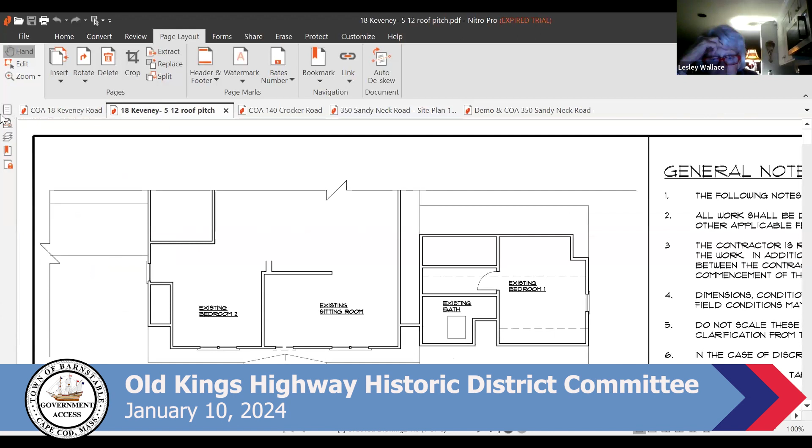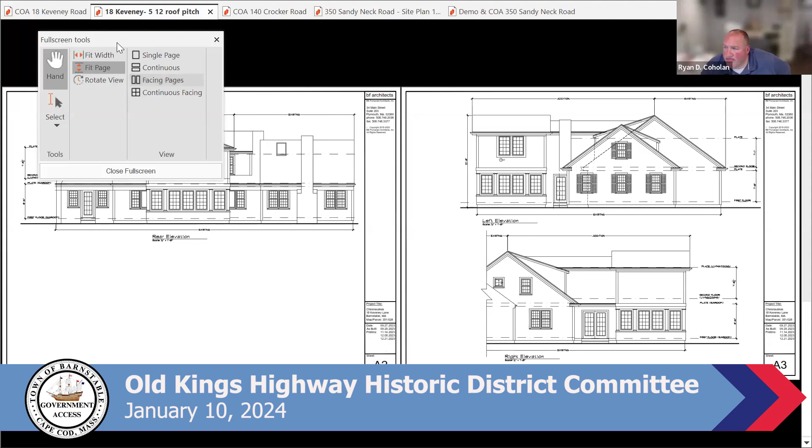If I may, Erica, the images are coming up a little smaller. Can you try hitting the show full screen button in the bottom? You said second floor, I'm looking at the first floor. My apologies. Point over to the left, the full screen, it may just be a little bit easier. Perfect. Thank you, good idea.

I'm guessing that you want a full flat ceiling on that second floor, correct? Yes, we do. Is there any reason why you don't want to clip it so that you can drop the plate?

They're just looking for the full ceiling height across the second floor. Yeah, okay, go ahead.

The reason we're doing this addition is Patricia is the homeowner. Her daughter is moving in with her as her caretaker, and she's going to use this second floor room as her living space.

Do you know what I mean by clipping? Yes, it's something I can explain - where you have the plate height that's less than the full ceiling height, so the windows are set just a little lower, but you're on the second floor, so you can work at the head of the ceiling.

The head of the window at 6'8", but the plate might be less than the 7'4" code requirement for ceiling height. You could probably go 7 feet with the plate, and then you might be able to work more than a 5-12 pitch. I'm not really upset with the 5-12 on the back of the house, but it's a way to work a steeper pitch and match up.

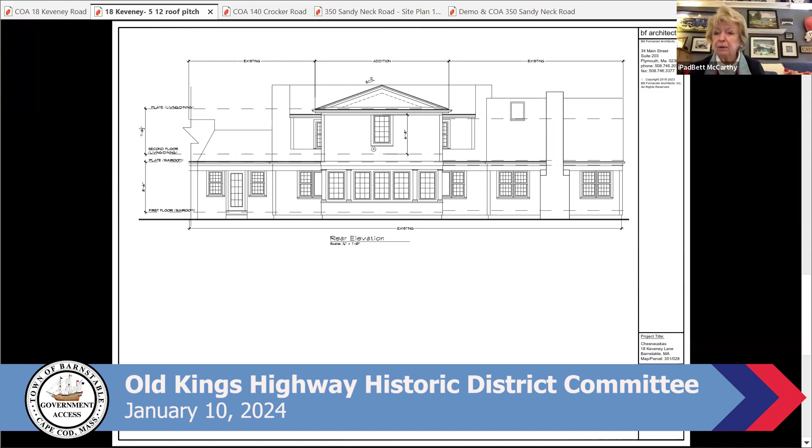I don't have an issue with the lower pitch because this addition is on the back of the house, and I do not think it would look all that attractive if the addition roof line was above the actual roof of the front of the house. So if a modification can be made per George's suggestion, and we come back to the next meeting, that would be agreeable to me. I don't know, but Ryan, do you have any comments regarding this?

Can I see the front elevation again? There isn't a front elevation, just the photo of the front of the house. I think there was a sketch where it showed what it might look like, right? But that was a side elevation, never mind. Yeah, it was the side elevation.

Right, so you essentially want to dormer that front above those 5 windows, right? Oh, it's in the back. Right, I'd like to understand. All right, so that's what you want to lift up. Right, that's what we're putting a second floor on, exactly. And is that ridge visible from the front of the property or from the street? That, and currently, no, you can't see anything from the front. The rear addition, you can't see anything.

But if we put the second floor on it and do a 7/12 pitch per the commission's guidelines, you'd see a small portion of the ridge on the front elevation, but it would be set fairly far back. Yeah, I mean, I think I agree with the commentary we've heard from the other committee members. I would much prefer to not see the ridge addition visible from the front of the property.

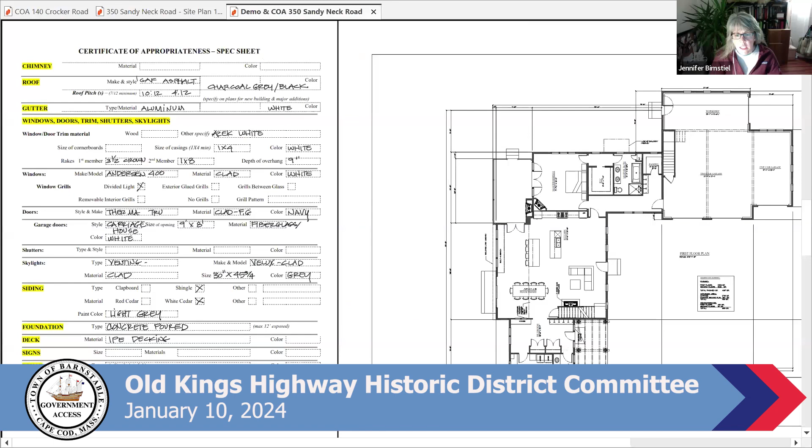So our application is to raise this house and build a new home in this existing spot. We are staying very similar to the footprint of the existing house, but enlarging it and adding on a carriage house garage to the side. We started out looking at it as renovating, but the scope became so much that it made more sense to raise the house and replace it from a cost perspective than to try to make the changes and add on. Part of that was going up, raising the ceiling height, which would have impacted the rebuilding of the first floor quite considerably.

But we have tried to stay in a very similar style to the house that we're removing. If you look at the materials list, we'll be using a pre-dipped cedar shingle, a light gray. We'll be using a carriage house style garage door, an Andersen 400 series Woodwright window, and a dark gray blackish roof shingle. And you can also see the doors that we're using there.

I'm not sure if Don wants to add anything to that. No, all sounds good, Jenny. Thank you. Okay.

We also, I guess I will add one thing. We went through conservation last month, and one small issue with the property is there is a small conservation issue on the property. That was another small reason as far as we're moving the house further from the isolated wetland on the property, which made them happy. The foundation has got a couple of small issues as well, and to be able to move the house away from that isolated wetland area made them happy as well. So that's kind of in a nutshell, the reason why we decided what we did.

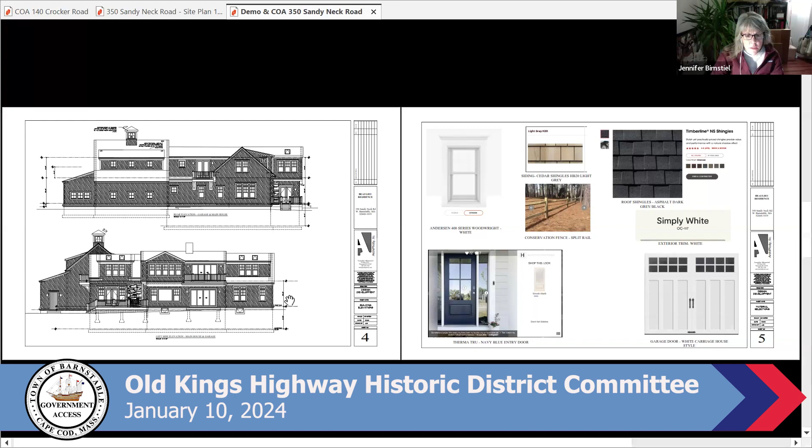You've got a full second floor balcony in the rear, I guess. How deep is that balcony as opposed to the Juliet, the full balcony over the sliders? Can you go to the plan, lower floor? I think it's on the floor plan, it says the depth. Can you put a recliner out there? Yes, I believe it's a minimum of 10 feet. That's over a deck on the first floor. Yeah, it's 10 feet by 16'1" by 11 feet. Okay, so that has a second floor that has a good useful area, which is important.

And the first floor is the same size, I would imagine. Yes. Okay, that could be bigger, but all right, those seem to work rather well. I don't think I have any other comments.

Do we know the roof pitches? What is the minimum? You have dormers, what are those? 3 and 12? There are 4 and 12 on the garage. And the side elevation, I believe they're the same. Yeah, 4 and 12 looks a little less.

I'm opening up the AutoCAD drawing now so I can tell you. Yeah, I still draw with a pencil. I drew with a pencil for the first 8 years and I loved it. My attitude is I'd rather think about what I'm drawing than how I'm drawing. So I've used the computer, but it's not my favorite way to draw.

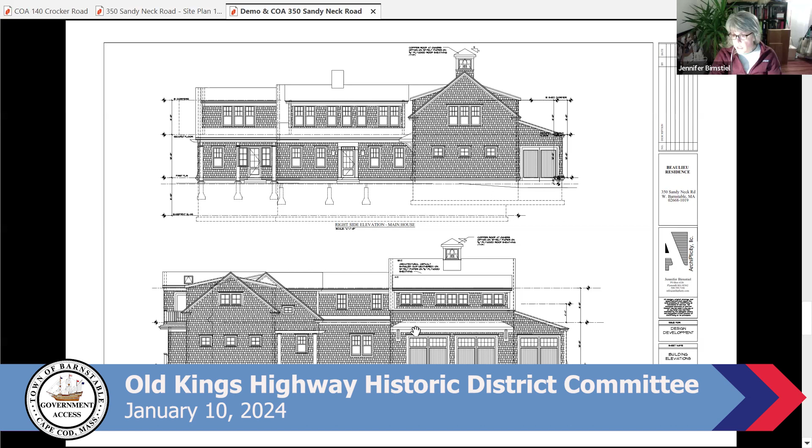Would you be saying, in between that connector piece and the garage, putting a 1-story connector and pushing the garage over to the right a little bit more? Yeah, okay. I just wanted to make sure I was clear on that.

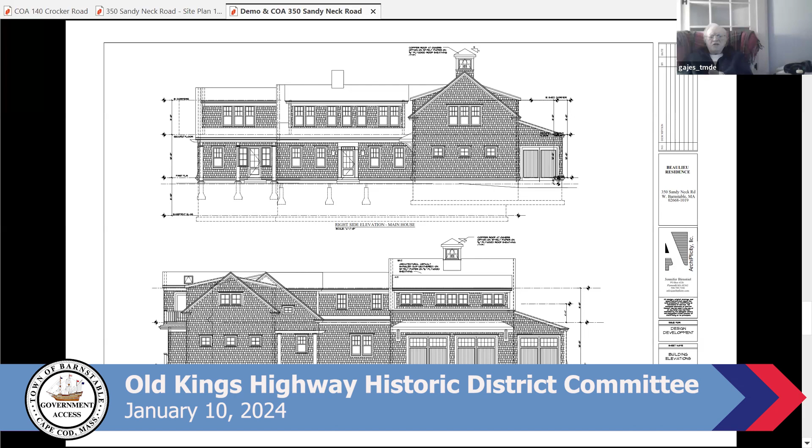What it does is diminish the overall mass by separating it into two separate masses: the house and the barn. It's like having the barn as a separate building, but the connector serves two purposes—it provides a separate entrance into the backside of the house, and it provides that visual separation. It doesn't have to be terribly large, just appropriately scaled so the space between the dormer on the house and the second floor of the barn works.

Scaled, I'm guessing, about the same as your lean-to addition. So what's that—the space above? That's going to be about 12 feet, yeah, something like that. 10 to 12 feet would separate those two spaces.

I think if you were to just overlay it and spread it, you get a sense of what it looks like easily. Of course, with me, I'd have to erase the barn and move it over—either that or cut the page in half and glue it back together. Here again, drawing with a pencil. But with the computer, it's so easy to move that over, and you can play around with the addition in a number of different ways without spending a lot of time on it.

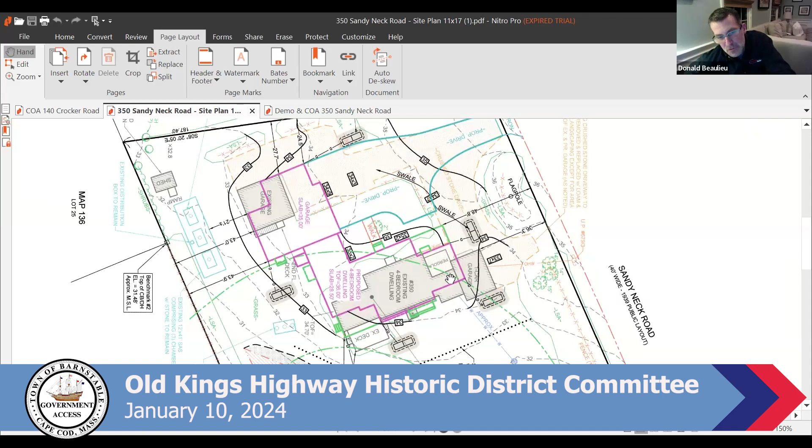But we also have a setback off the edge of the property, which currently we're at 24 feet. I don't know if you're looking to add—I'm not exactly sure. I can't remember what the setback was. I thought it was possibly 15 feet. Yeah, it's likely 15 feet. Okay, how far are you there?

I think ultimately I would ask the homeowner, is that what you want? Do you want a single-story connector? I'm opposed to it, to be honest with you. I can imagine what the interior would look like and how everything's going to connect, and I think any future work above the proposed garage—you're kind of cutting yourself off. I don't disagree.

But we still have the problem of a big structure there, you know? Right. I guess I'm just trying to understand—by the property size, it's just over an acre property. It's not like it's a 10,000 square foot piece of a building or something along those lines. There's a lot of fairly large houses in the area, also in the historic area as well.

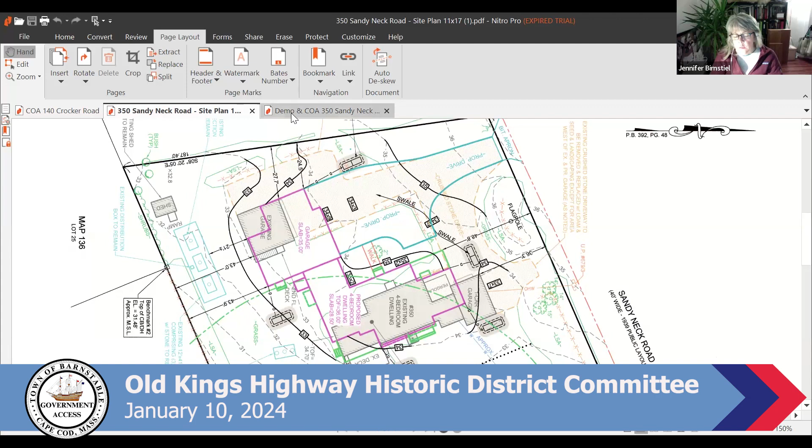Could I ask one other question on the design? If we went to the front elevation - I don't know how Don would feel about this because we haven't gotten to talk about it - but what if we dropped the roof line of the garage so that it was more of a full dormer, so that 10 pitch dropped down to be more even with the eave of the connector piece, so it felt lower. Those windows could be bigger windows, and it wouldn't really impact the use of the space up above, but it would bring your eye line down some. I don't know if that would make anybody feel better.

Well, I don't know if it's the height of it or the length of it that is making it seem bigger. That's the problem. To me, it's the length of it. I like the lines that it is now. I wish you could knock that last garage off, but other than that, it kind of looks nice with that roof line.

Yeah, I think I agree with Leslie. I mean, I like the way it looks right now. I get it's big, but there are big houses in that neighborhood. Sandy Neck Road is not a scenic road - it's in the district, but it's not a designated scenic road. And I think, to your point, we did try to look, even if it's not right on the street, at adjacent properties, to what Don said when we were trying to think of its appropriateness, because it's not a historic property, but it is in a historic area.

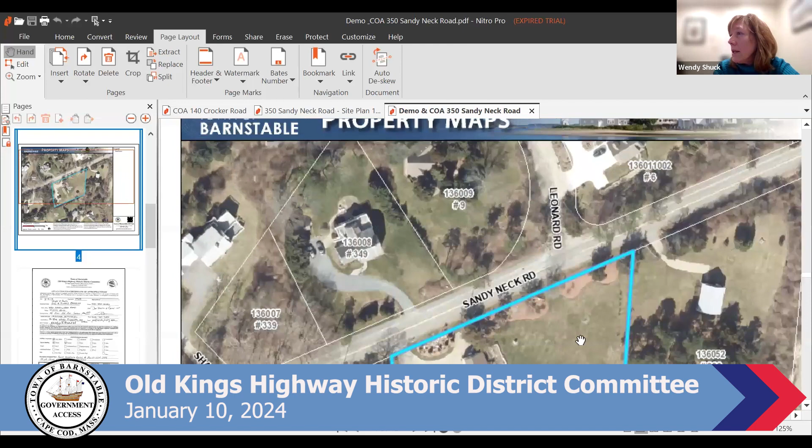You see that floor plan? Yeah, on the right side, it's just a tiny little thing, and this is Beth McCarthy - I happen to agree with what Wendy has said. And I just think this house, as it is proposed, the mass is just much too large, and I think it needs to be reconfigured.

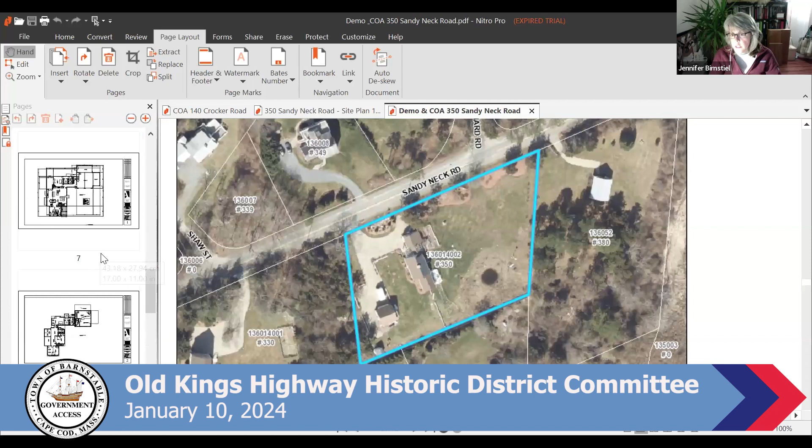Okay. The only other thing I was asking is there a way that might be acceptable without increasing the footprint size of the house? Because I know Don has an objection to doing that. That's why I was asking about dropping the roof line - I understand how you feel about it, and certainly I'm happy to do any drawings to help alleviate the feelings of the committee. But is there any way that you would consider that doesn't increase the square footage of the house?

Is there any place that third garage bay could be moved somewhere else on that barn? That's what I'm thinking, yes. Because 12 by 24, that doesn't seem like a lot, but it adds, and when you look at it, your eye goes to that. Don, I understand you want a place to work, a workshop. My dad had one, I understand it. But your eye goes down, that bothers me. I wish we could get rid of it or put it in the back or do something with it. In addition, it's the connection from the main house to the garage, and that also increases the mass.

And I've got another idea, the one with the 2 windows up top. Let me ask, Don, how would you feel if that second floor of the connector attached to the carriage house was a dormered section rather than a full second floor? Suppose there were doghouse dormers where the windows are, instead of a full 2-story elevation. Suppose you had 1 story with the second floor ridge matching, but dormers instead of that shed dormer look or the 2-story look.

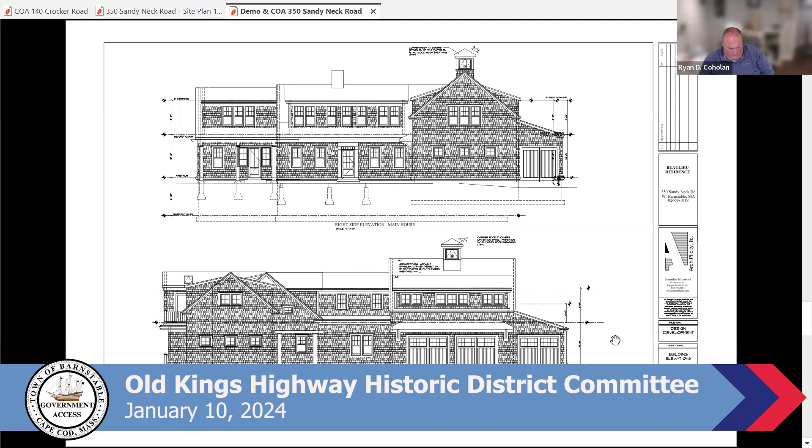Okay. Yep. Ryan, hello, we caught you looking at that. No, so we need a motion to do that.

This is Wendy Shuck, and I move to continue the certificate of appropriateness application and the certificate of demolition application for Triple C Realty LLC, 350 Sandy Neck Road, West Barnstable, map 136, parcel 014/002, built 1965, to January 4th, 2024 at 6:30 p.m., meeting to be held remotely.

January 24th. Right, I got it right this time, right, Kate? I hope. All right, 24th, but I think everyone's clear. Yeah. Do we have a second? Leslie Wallace, I'll second. Thank you.

And a roll call vote. George Jessup, aye. Leslie Wallace, aye. Ryan Coholan, nay. Wendy Shuck, aye. Pat McCarthy, aye.

So we now have another application for us to consider. Thank you. Yeah, thank you very much. Thank you, Jennifer. Thank you, Donald. Thank you.

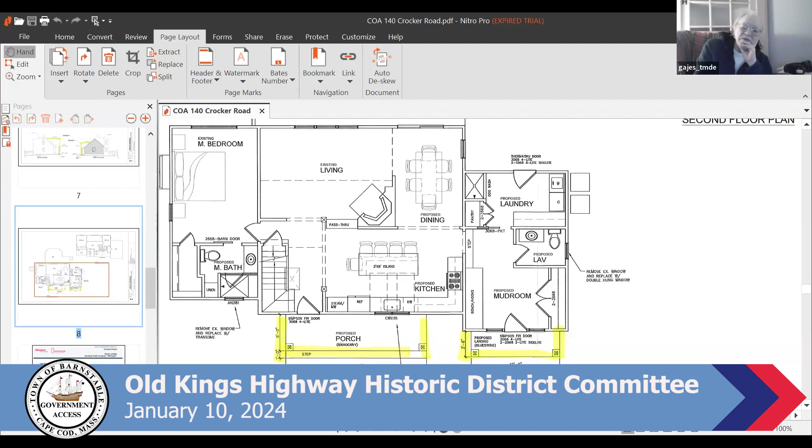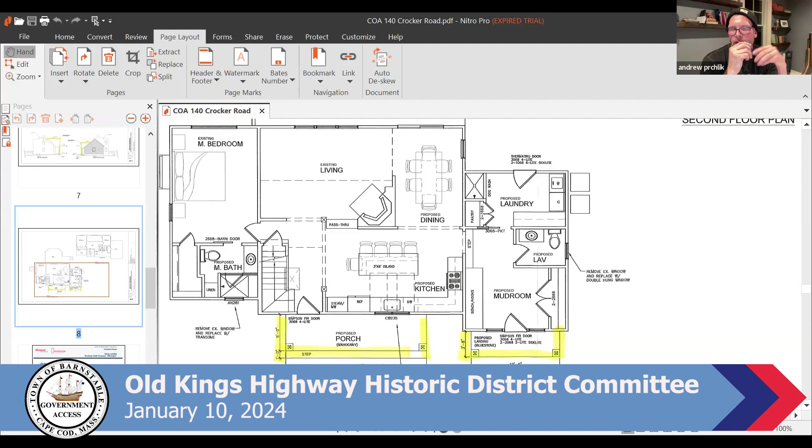I'd still like to see it elevated. You're going to have to run piping, be concerned about that. Get it up level with the existing floor. Building code would require that it be R30 in that floor system. Yeah, I don't think that that's too precious, that any of those opinions would be objectionable to Matt or Linnea, certainly not to me.

How is that handled with this evening, however? Is that also a continuance, or is that something that is? Well, we'd kind of like to see how it's going to work, and I think you'd want to see how it's going to work, so that there's no doubt about the revisions.

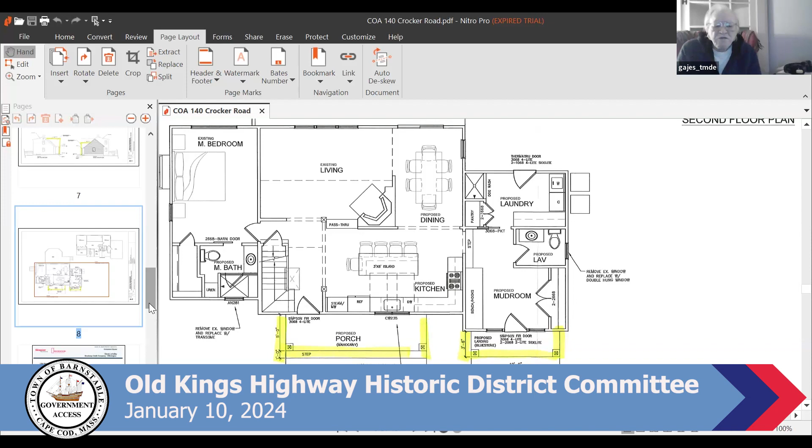Looking at that projected porch, that's a new roof line there. It is, and that's why I think that's appropriate. How many posts do you show? Just 2? Yes. You might consider a 3rd post, the area at the front entrance, which is not the mudroom, but the main door at the staircase.

You need to do something there, maybe a center post. I know you don't need the structure, but I'm looking at it with the idea that you need something that focuses attention on the entrance rather than the blank space in between. If you put a post in there, you divide attention between the entrance door and the window.

How are you going to use that porch? I have no idea. They'll probably throw a couple of chairs out there and just enjoy an evening.

If it's just an area in between, well, here we go. I don't need to redesign it for you, but what I would look at is: can we use that double window there as a projection and have a recessed entrance, so that your focus is fully on the entrance rather than the space in between.

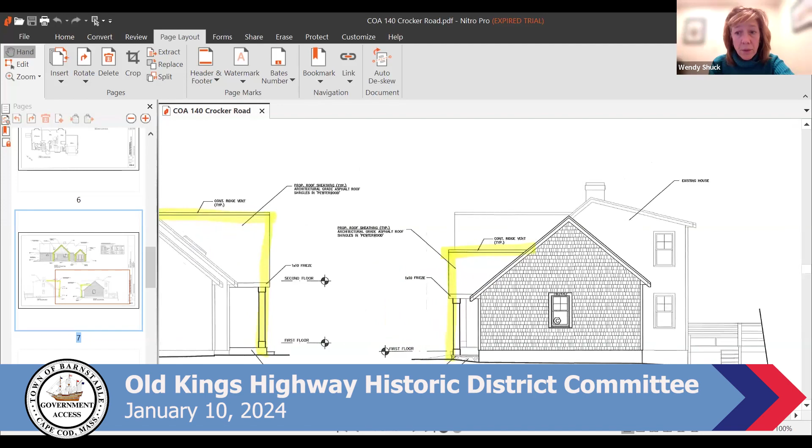Well, I think as far as raising that gable end, right? So should we continue and then take a look at what they're able to come back with, see if this is all doable for them? I gotta be honest, I have to ask the homeowner, do you want to do that?

The neighborhood is like a patchwork neighborhood to begin with. Every house there looks different. This house is kind of hidden behind a screen of trees. There's no trees in our front yard.

I would just add that there is a cost associated with it. Whether or not you agree with it aesthetically, there is a different construction process that's going to be necessitated, and all of that is accompanied with a cost.

I don't think any of the suggestions are bad suggestions. I just wonder if they warrant, or what we're gaining actually by raising that front step. I understand with the grade levels, it all makes sense. As far as the piping and plumbing, the bathroom and mudroom laundry are all to the back in line with the kitchen. It should all be up high enough to get any existing piping and electrical out there.

The only thing I'd be concerned with is the insulation, like you said, but we can get R30 there with other ways, a closed cell or flash and batt, getting ways to minimize the floor system with a better insulation. I'm not opposed to moving that up and having to do that if we do.

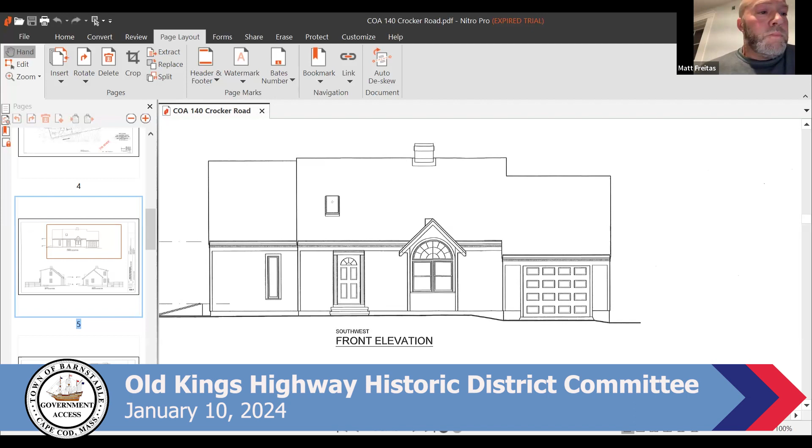So that's with your floor at 4 inches above grade, the driveway level, or less than 4 inches. I see what you're saying there, below the grade. What you want to do is fill in the masonry to bring your grade up, and you're going to have your porch level with the existing front step, and your interior floor is going to match your existing interior floor instead of a step down. The step down wouldn't transition until outside the mudroom area.

The step down has to be the existing floor level plus just the framing. And what you really want to do is frame level with the existing floor framing, so that when you try to put the piping over the concrete slab that you have and the concrete wall that's inside, you don't have to rip a hole through that concrete wall to run your pipe from your proposed plumbing to tie into the existing plumbing. We already have all those clearances to make it out underneath that flooring without going into the slab.

Where are you going into? Into the existing house, the existing basement. There's a 3-inch pipe—I'm actually the licensed plumber—there's a pipe below there that is feeding the existing laundry and second floor bath that can be drilled through at a height below the floor, but also above the concrete, to extend over to the new toilet and bath area.

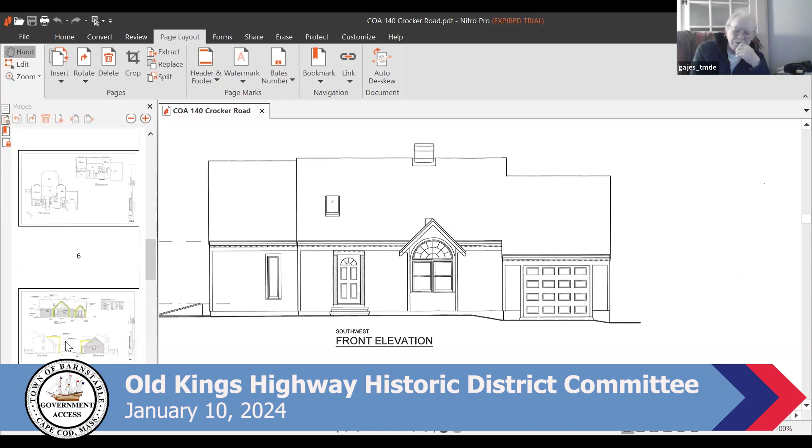Well, this is a problem you've got to work out. What we've done is offer our alternate appearance on the front: raise that gable end on the end there by extending the front projection at the same level, and raising the entrance door and the side panels, and then filling in the masonry wall where your garage door is to bring it up to the existing wall plate. That provides you with the proper increase in grade height, so you don't have a problem of water infiltration. That's why you want to do that with these garage conversions.

Is it a requirement to bring it up to grade, or is it just wanting to please what the historics are going to want to see? Because visually, you don't have to. It's going to look better than what's here, and we're just trying to improve the front entryway.

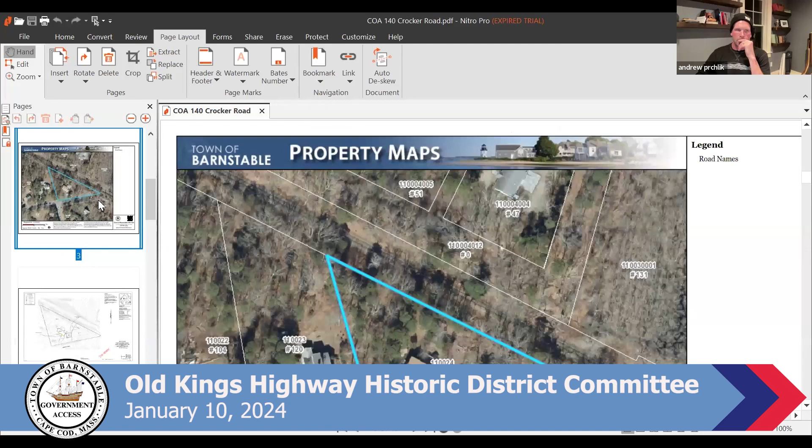Like you said, Ryan had said earlier, everything in this neighborhood is different style houses, they're all over the place. There's salt boxes, you know. Yeah, I think the area we're talking about is going to be 80 to 100 feet away from the street and most traffic. It's at a weird angle lot, you know, a triangle.

Yeah, it's a strange lot, on a cul-de-sac. I agree, I think it's an improvement to the house. It will definitely make it look better. Do I think George's ideas would be an added improvement? Probably, but I completely agree. It is a very eclectic neighborhood with all kinds of different style homes, and I think what you presented is an improvement over what you have right now.

If you guys want to go back and talk about it, cost has got to be an issue here. Obviously we're not trying to spend everything, but we want to do it in what makes sense. So are you willing for us to continue this and come back to our next meeting?

We have to, I guess, if we're gonna have to redraw. No, what do you want to do? I'd like to keep it as it is. I don't think the grade is an issue. There are other things you can do to make it work. As far as what we've figured on site and what can be done, everything's doable as we have it drawn.

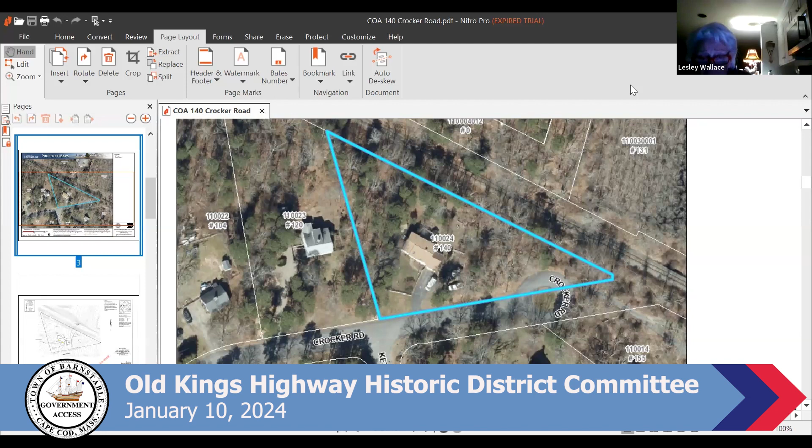Well, it does look better and it's an improvement, and you got to factor in the cost, God knows with this economy. I think if you want to go ahead with it, I'm fine with that. That would be great. Thank you, George. I do like your suggestion, but with all the considerations, Matt's got to live there and he's got to be happy with it.

I think it would be a nice transition. The grades are already at where they're at and we haven't had any issues ever with anything like water. Plus there'll be drainage work taken care of to get that water away from the house through the roof.

So to be clear, you want this application to stay the same as what you've originally projected, is that correct? Correct. And no change? No change. Okay, all right.

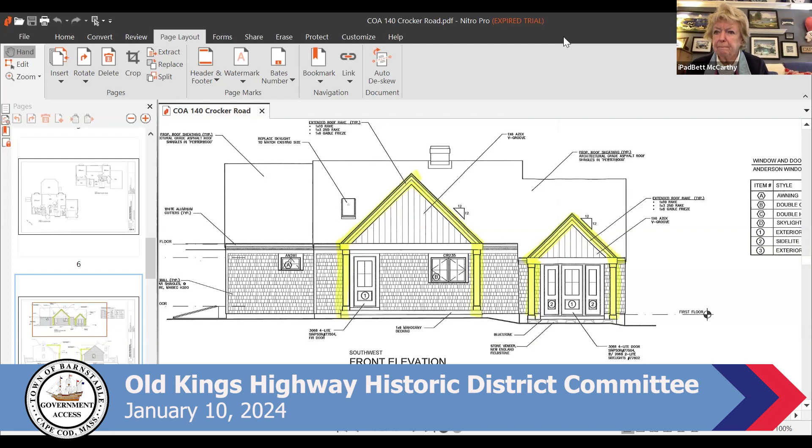So we now need to know if there's anybody from the public wishing to make comments. This is Erica Brown - there is no one from the public wishing to speak to this item at this time. So then we can close the public hearing for this application.

This is Wendy Shuck and I move to close the public hearing. Okay, and a second from Lesley Wallace. Roll call vote: George Jessup, Aye. Lesley Wallace, Aye. Ryan Caholen, Aye. Wendy Shuck, Aye.

And Beth McCarthy. So now we need a motion to approve the application as submitted. This is Wendy Shuck and I move to approve the certificate of appropriateness application for Matthew and Linnea Freitas, 140 Crocker Road, West Barnstable, map 110, parcel 024, built 1988, as submitted. And a second, Lesley Wallace.

Roll call vote: George Jessup, Abstain. Lesley Wallace, Aye. Ryan Caholen, Aye. Wendy Shuck, Aye. Beth McCarthy, Aye. So the application is approved as submitted.